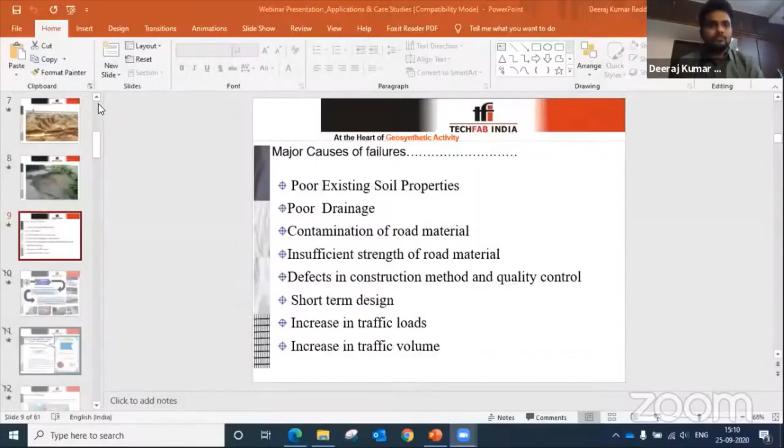So good afternoon all, myself Deeraj Kumar Reddy. So I feel privileged to be one of the resource persons speaking in front of you all, and being one of the alumni of Vidyanikethan Engineering College. And today the presentation I'll be speaking on is applications and case studies of geosynthetic materials in road pavements.

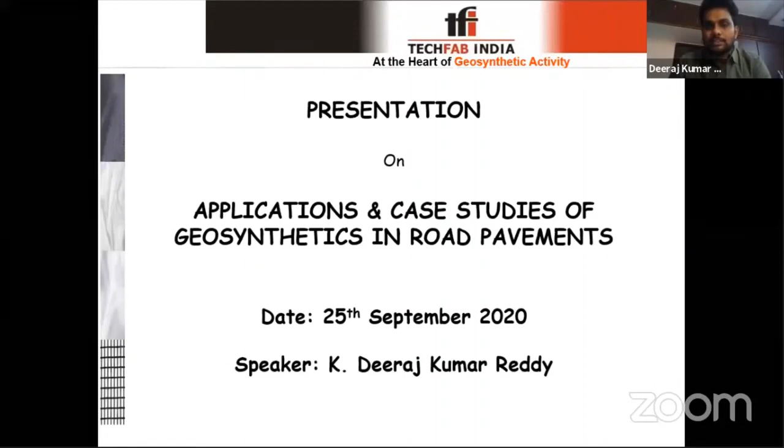So now, as you are aware, the development of roads is given prior importance in India. And just for your knowledge, in India, 60% of total goods and 85% of total passenger traffic is carried by road networks. And as a result of that, over a period of the last 60 years, the road network has increased by 11 times.

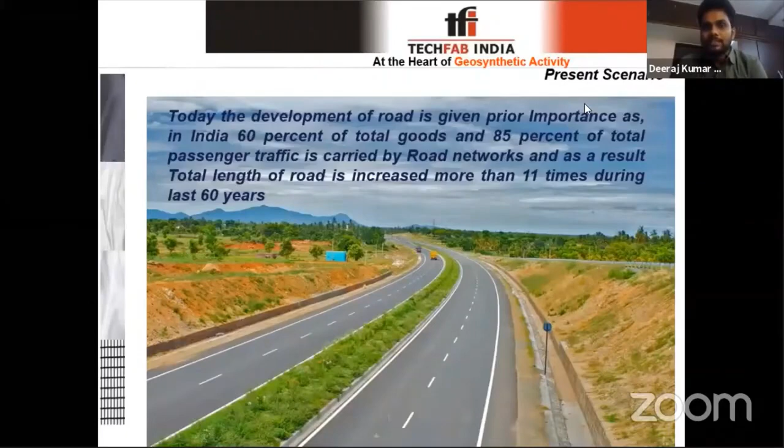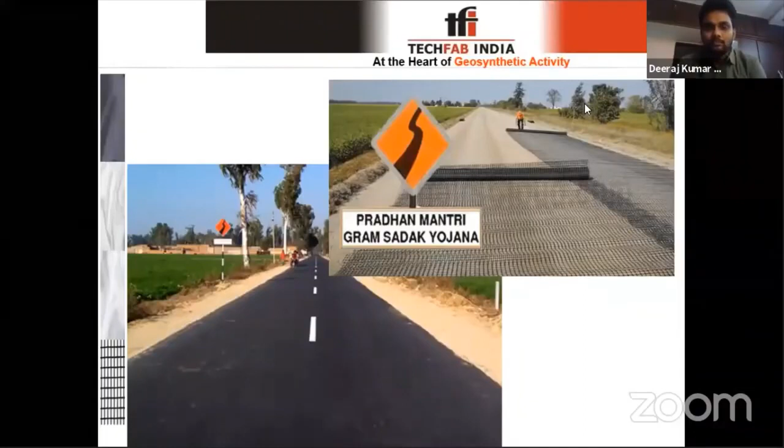And I'm very happy to present you very good roads in India, including the rural roads, which have been of prime importance over the past few years. But at the same time, we should accept some harsh reality where due to various reasons, the situation of roads in India are like this.

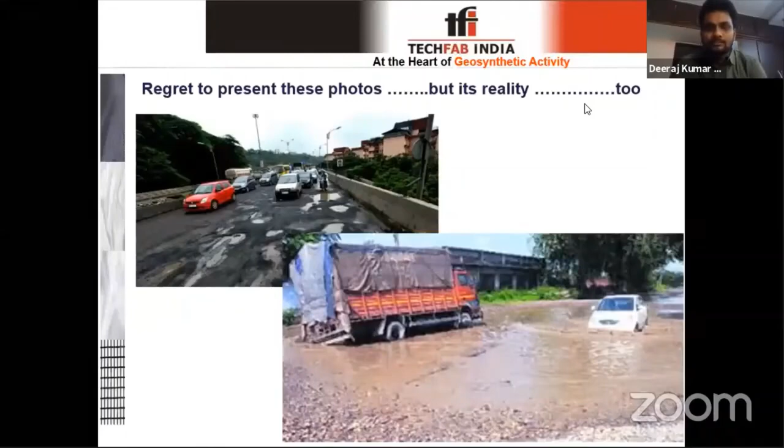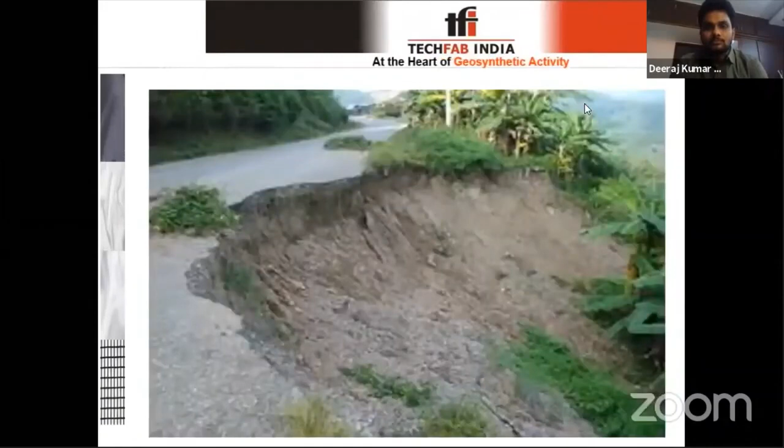Due to poor drainage systems, slope failures, or erosion failures. So when we talk about the major causes of these failures, starting from the poor existing soil properties, because we cannot eliminate the use of poor grounds from constructing the road network, and the poor drainage - that is, when we are planning for construction of a road pavement, we do not plan the drainage system, which is of prime importance.

And the poor drainage system will cause the failure of the total structure, and the contamination of road material. Then it is the insufficient strength of road material, that is the granular materials that we use in the road pavements - if we have insufficient strength, that can lead to the failure of road pavements. Defects in construction method and quality control.

Even if you design with 100% accuracy and perfection, if someone at the site doesn't implement what you have designed correctly, that leads to failure of your design structure. Then there's short-term design, increase in traffic loads or volume. At the design stage, you design the road pavement for 15 to 20 years, and if the traffic intended for 15 to 20 years is fulfilled within 5 years, that is a short-term design. That is also one more reason where road pavements fail.

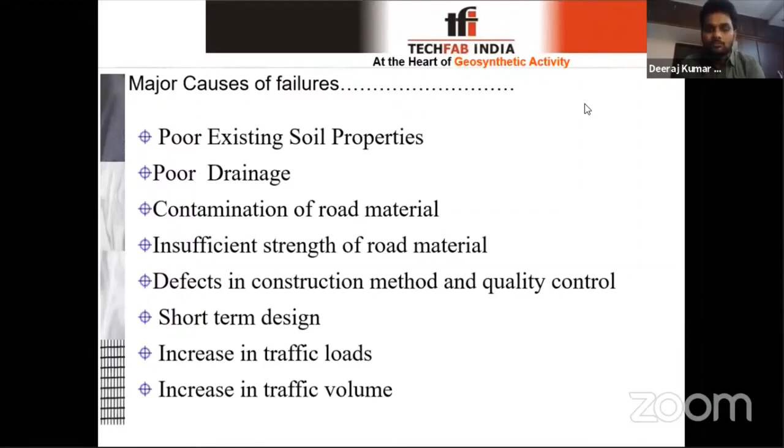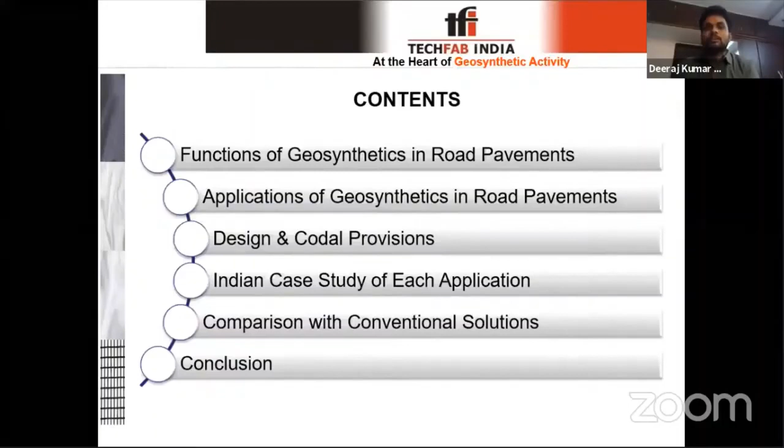Now that we have discussed various causes of road failures, in today's presentation we will see the functions of various geosynthetic materials which can be used in road pavements to address these issues, and the applications of geosynthetics in road pavements. With each application, I'll discuss the design and codal provisions, because there are certain codes and guidelines in India available for each application of geosynthetics. Earlier, before 5 or 6 years, the availability of standards and guidelines in India was very less for geosynthetic applications. But now they have emerged very rapidly, and usage has grown very much. For each application, I'll show you one case study of how it is implemented at site, and then we will see the comparison with conventional solutions, since geosynthetics are implemented as an alternative to conventional solutions.

Starting with the functions of geosynthetics, this is how we can avoid the failures we just discussed. First is separation function. Then it is drainage, the collecting of precipitated water and discharging it to safer places. Then it is filtration - allowing water to pass through different layers while not allowing soil to pass through, preventing the mixing of two soils while allowing water to dissipate. Then it is reinforcement, generally strengthening of a particular layer or material. And the barrier function, to arrest the capillary rise of water.

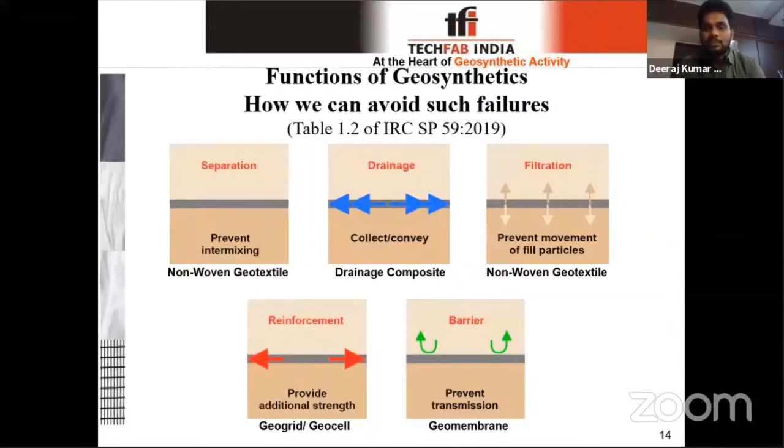With these functions, we have different applications of geosynthetics that we will see one by one. The applications of geosynthetics, which are cost-effective solutions with all codal provisions used as an alternative to conventional solutions, start from subgrade separation and stabilization.

If you are aware of the pavement structure, it has a subgrade, which we call the existing ground. On top of the subgrade we have GSB, granular subbase, made up of granular material. Then we have the base layer, wet mix macadam, and then the bituminous layers - this is in case of flexible pavement. In case of rigid pavement, there is an existing ground, and on top of that a granular subbase which acts as a filter layer or drainage layer, and then on top of that there will be a concrete slab. In all these layers or parts of the pavement, we have different applications of geosynthetics.

Starting from the bottom: subgrade stabilization or separation, then ground improvement for road embankments, because when your road embankment passes through very poor soil, you need to improve that ground to make it suitable for road construction. Then it is subsurface drainage, drainage within the pavement structures, because when rainfall happens and water infiltrates the pavement structure, that needs to be discharged to safer places. Otherwise, infiltrated water will stay within the pavement structure and destroy it.

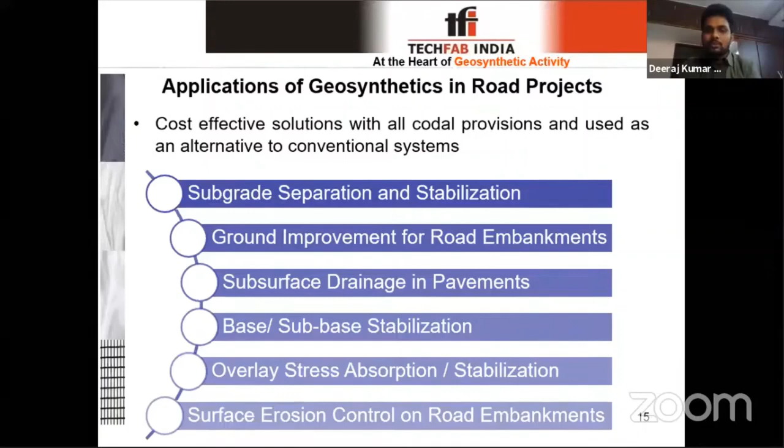Before going to the applications, I would like to focus on the standards and guidelines available for geosynthetic applications. First, the Ministry of Road Transport and Highway specification, section 700, which exclusively deals with the specification of geosynthetics for various applications in road construction. Then there is IRC 37, the guidelines for design of flexible pavements in India. And IRC SP 59, the guidelines for use of geosynthetics in road pavements and associated works - this code is exclusively for geosynthetics, covering design methodologies, applications, working mechanisms, installation methodologies, everything.

Then IRC SP 42 is the guidelines for road drainage, and IRC 113 is the guidelines for design and construction of geosynthetic reinforced embankments on soft subsoils. IRC 75 is the guidelines for high embankments. IRC 34 is the recommendations for road construction in areas affected by waterlogging, flooding, and salt infestation. Then IRC SP 116 is the guidelines for design and construction of gabion structures.

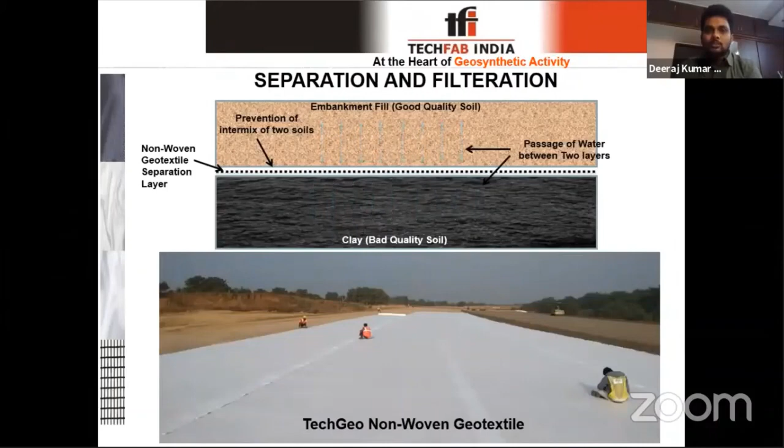So in order to separate these two layers, we use a non-woven geotextile which separates the two layers, and at the same time allows water to pass through, because if you arrest the water passage, it will develop pore water pressure and cause unnecessary problems. So this geotextile will only restrict the passage of soil particles and allow water to pass through. This is about separation and filtration.

When we talk about non-woven geotextile applications, the BIS code 16363, the Ministry of Road Transport specification, and IRC SP 59 cover the minimum requirements of geotextiles for use in road pavements as a separation or filtration layer. There are three conditions of installation, and based on our project situation, we can adopt the type of geotextile to be used, because harsh, moderate, or less severe site conditions require different strength requirements of geotextiles.

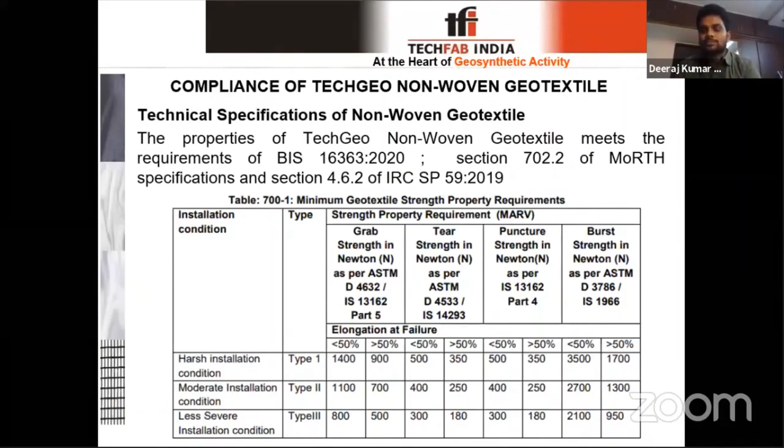Regarding the case study for the separation and filtration function, I'll show you one of the projects which is executed, or being executed, in Gujarat currently. That is the Vadodara Kim Expressway, executed by NHAI, with the contractor being L&T.

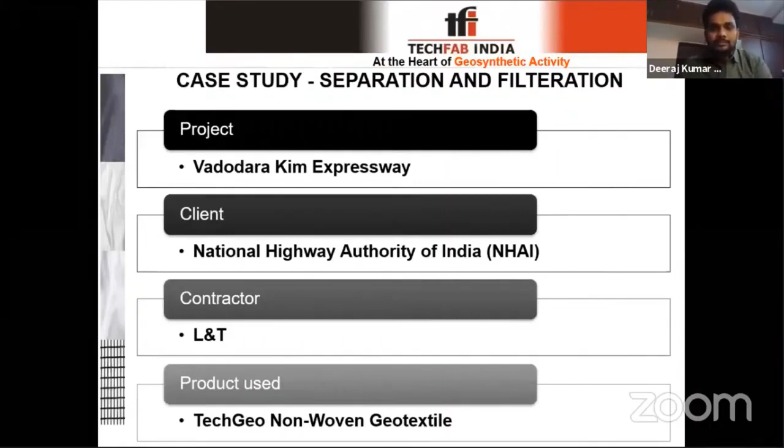Actually, the soft clay in the existing soil was the main problem here, along with the possibility of intermixing with the granular layers above, which would deteriorate the strength of the granular layers. Hence, there was a need for a separation and filtration layer, and the non-woven geotextile, meeting the requirements of MORTH 700 specification for separation and filtration geotextile, was used in this project. You can see the condition of the soil in the subgrade, which is purely black cotton soil, expansive and very weak in strength.

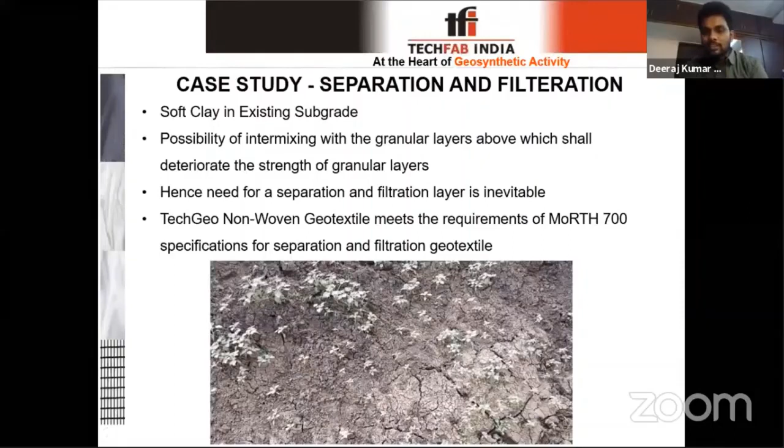These are some of the project photographs. Basically these geotextiles come in the form of rolls, where each roll is around 5 meters wide and 100 meters long, and these can be customized based on our requirement.

These rolls are first unrolled as per our markings, and as the road pavement is wider than the geotextile, adjacent rolls are needed, provided with an overlap of 100 to 150 mm. Once these geotextiles are laid, the remaining granular layers, gravel, GSB, and other layers will be laid, and this geotextile will prevent the bottom soil from mixing with the granular material laid on top of it.

The next application is ground improvement involving geosynthetics. This is especially required where you are constructing a road embankment, that is, making your road elevated from the existing ground. There are various options like basal reinforcement, reinforcing the bottom of the embankment with geogrid or geocell, and subsurface drainage, where infiltrated water from the top or capillary rise needs to be discharged laterally using subsurface drainage and separation geotextile, as we have seen. There are other applications too, like deep foundations with basal reinforcement with piles, and staged construction with PVDs and stone columns.

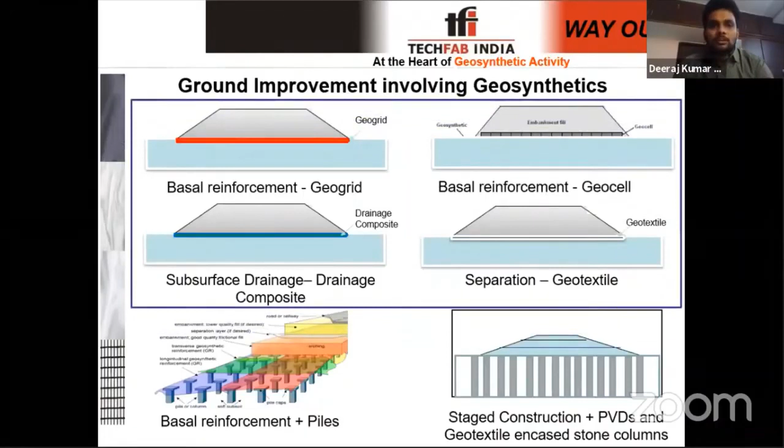Now our focus will be on the stabilizing of road embankments with geocell. So what happens is, when you have a road embankment and your loads come from the top, this is the comparison between the road embankment without reinforcement and with reinforcement.

At the point where your reinforcement is laid, you can see the difference, because whatever loads come from the top of the embankment are directly transferred onto the poor soil conditions in an unreinforced embankment. In case of a reinforced embankment, this is a geocell, a 3-dimensional honeycomb structure. If you fill some material in the geocell, through lateral confinement it confines the material and forms a slab-like structure.

At this point, whatever loads or pressures come from the top will be dispersed laterally. This is the reinforcement effect, where pressures and loads are dispersed laterally. It's not completely dispersed - some amount will be dispersed laterally and the remaining transferred down. So the loads coming from the top are minimized on the poor ground, enhancing the performance of the road structure.

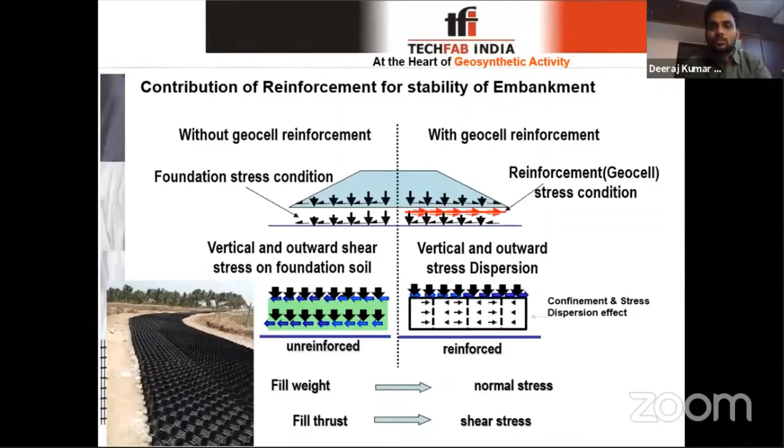Regarding the design of geosynthetic reinforced embankments, I've discussed the various codes - IRC 75, which gives guidelines for design of high embankments, and IRC 113, which covers design and construction of geosynthetic reinforced embankments. If you have basic fundamentals of geotechnical engineering, you can easily understand the guidelines or standards given in this course.

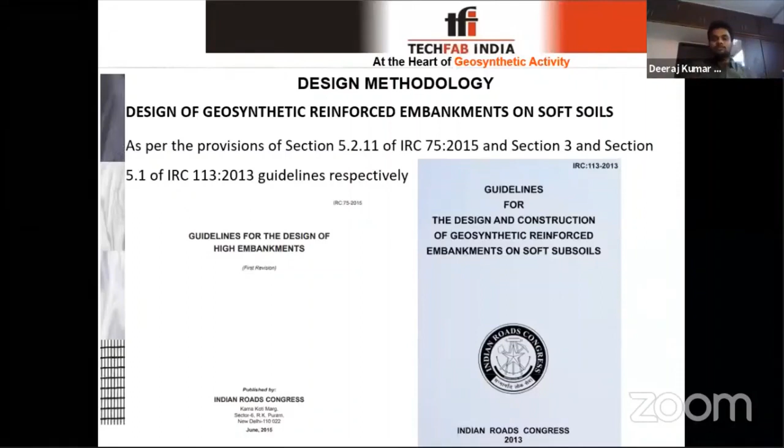Regarding the technical specification of the geocell, that is specified in the ministry's specification and IRC SP 59, which includes density, environmental stress crack resistance, carbon black content, cell wall thickness, peel strength, and creep rupture strength of the geocell.

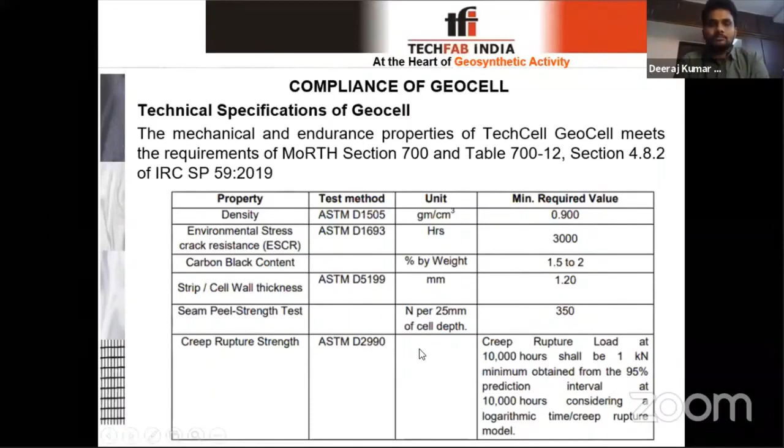Regarding a project which includes geocell, I'll discuss one project at JNPT, that is Jawaharlal Nehru Port Trust in Mumbai.

The site was near shorelines, complete marine clay, which was having differential settlements, and the parking lot would be subjected to very heavy loads with containers and trucks. So very poor bearing capacity of foundation soil and differential settlements were the major problems. These problems required measures which would dissipate the loads evenly and minimize these issues. As you can see in one of the photographs, the ground is sinking here.

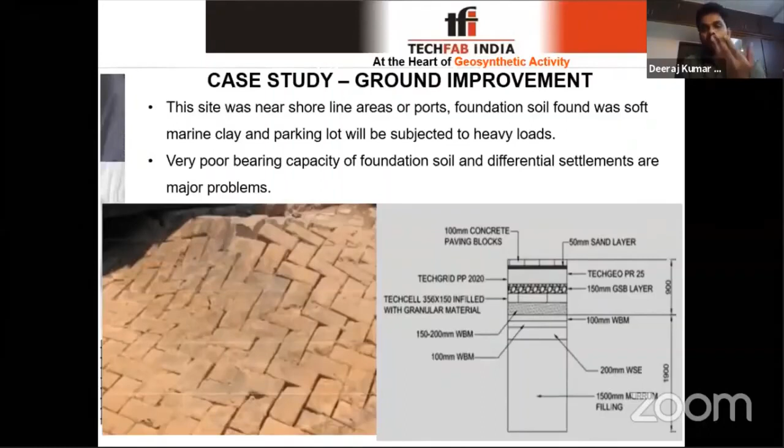This is the problem - loads such as containers or heavy trucks, if they come on top of this kind of ground, they absolutely sink at that point. These are some of the photographs.

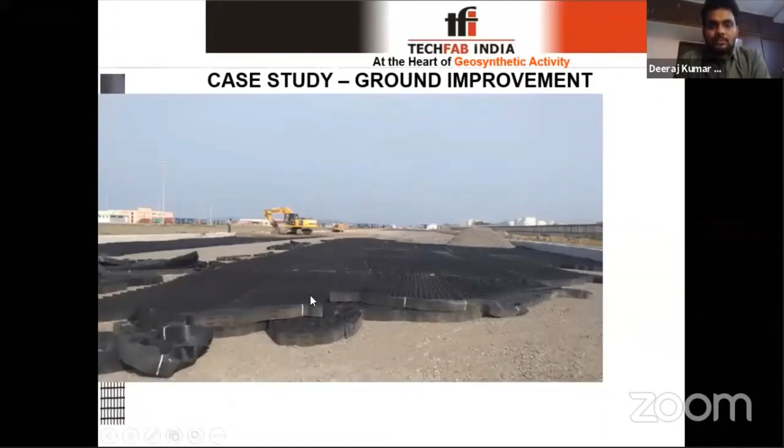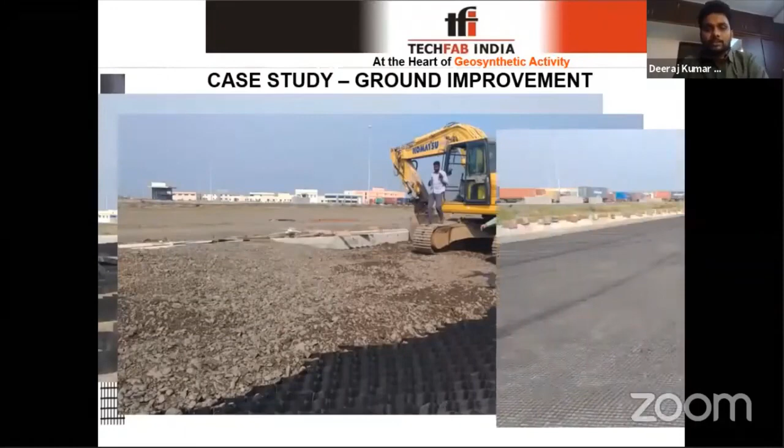These are the geocell panels which are spread initially on the ground, and in these geocell panels the fill material, that is granular fill, is spread and compacted. This is a geogrid for more even distribution of loads. And this is the finished structure of the parking lot.

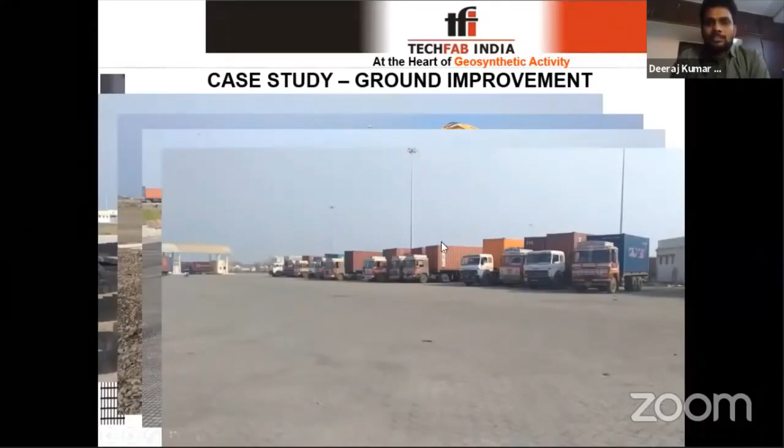So this is about the case study of ground improvement. Next, we will talk about the most happening or most trending application of geosynthetics in India in the last year - stabilizing the base and subbase layers of the pavement.

These base and subbase layers, which are the granular layers of the pavement, if we strengthen these granular layers, that will improve the modulus of that layer and thereby enhance the life of the pavement. Or if we want to keep the life of the pavement the same, we can optimize the cost of construction of the project.

If the cost of construction of a particular project is maybe 100 crores, we can optimize it - even if we optimize it by at least 10 crores, that is also a huge saving for the contractor or for the government.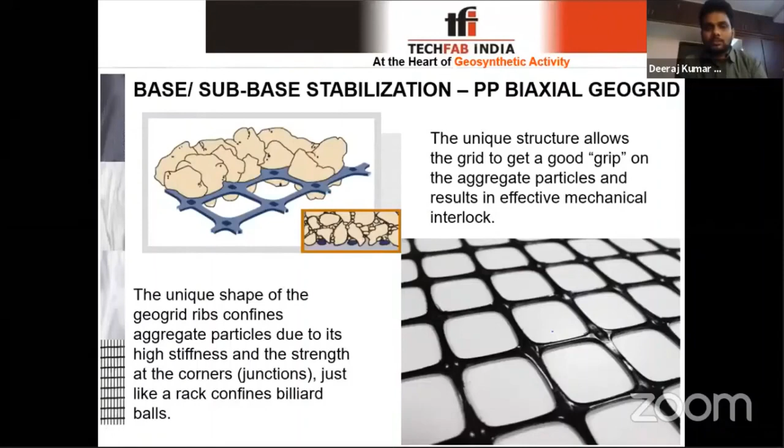The geogrid shown in this photograph is a biaxial geogrid, which has extrusions at the junctions, and this unique structure allows a good grip on the aggregate particles. If you have the aggregates on these apertures, they interlock with each other and you get a grip, thereby the strength effect is transferred onto the aggregates, and your layer gets strengthened.

So what are the benefits of PP biaxial geogrids in the pavement? First is thickness reduction. For example, if you have a constant life and soil properties used for conventional pavement, you can reduce the thickness of each layer. When you reduce the thickness of each layer, that directly impacts the cost of the total project.

Then there's an increase in the design life. For example, if conventional pavement is designed for 15 years, and at later stages during construction the authority decides to improve the design life from 15 to 20 or 25 years, that can be achieved using reinforcement in the base and sub-base layers, because that will enhance the life of the pavement.

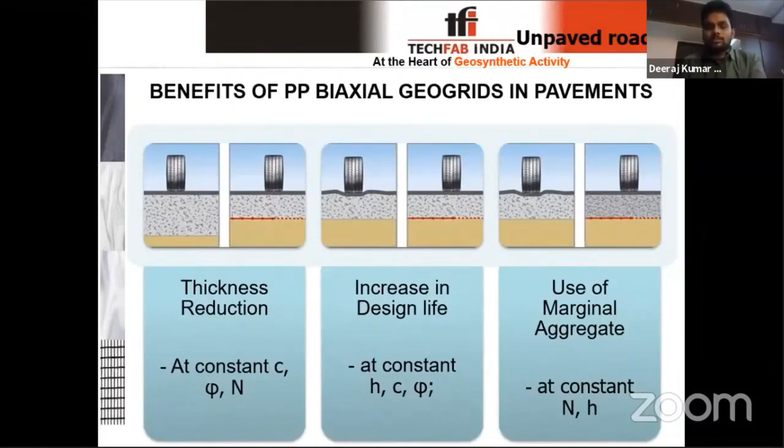Then use of marginal aggregate. Marginal aggregate is material that does not have the required strength of the natural aggregate used in pavements. These are especially available in the east and northeastern parts of India, where you do not get adequate strength of aggregate materials. So that material can also be made use of in the pavement structure using reinforcement, thereby strengthening that particular layer.

When we talk about the design methodology, IRC 37 2018 and IRC SP 59 cover the design methodology of reinforced pavement using two methods: the modulus improvement factor method and the layer coefficient ratio method. Either of these we can use to improve the modulus of that particular layer, and when we improve the modulus, the strength of the pavement is being improved.

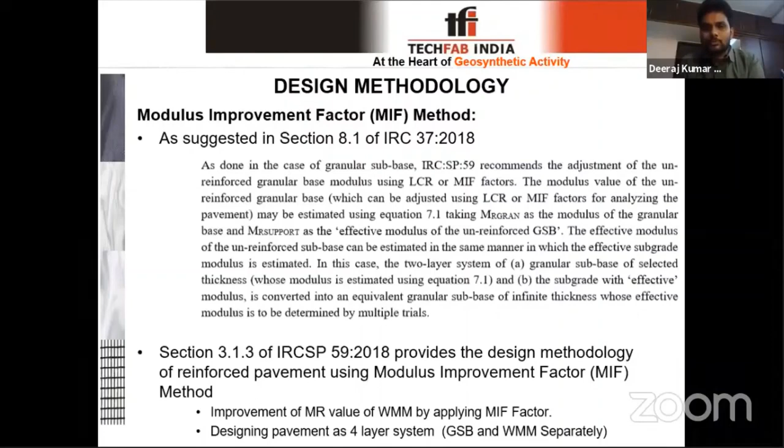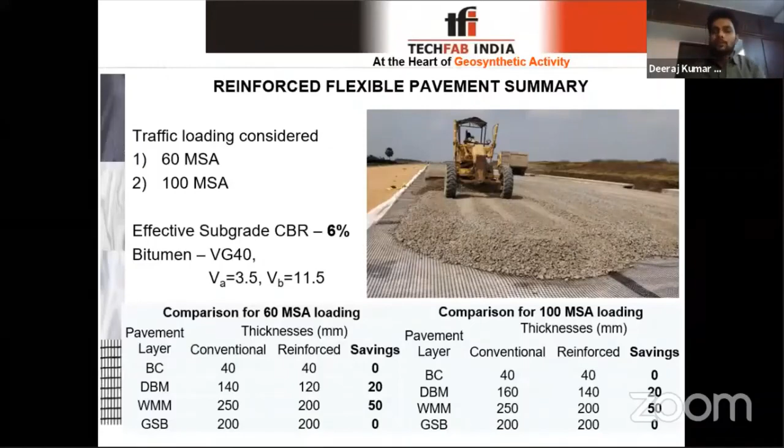This is a calculation, I'm not going into the depth of it. This is a summary where you have traffic loading of 60 million standard axles and 100 million standard axles, and your subgrade, the existing soil CBR, is 6%. Just showing a comparison where you can see the bituminous layers and granular layers, you can save certain thickness, that is 20 mm and 50 mm. That means there is a significant saving in the material being used, and at the same time your construction period also comes down, resulting in overall reduction in the cost of the project.

When we talk about specification, the BIS code 17371 and the ministry specification IRC SP 59 specify the same table I'm showing here, where the stiffness of the geogrid, the strength at 2% and 5% strains - the requirement is to achieve maximum strength at very minimal strains. Then the junction efficiency, as I was saying, is the most unique part, the junction of this geogrid, so junction efficiency is one of the main factors. And the ultraviolet stability is for the durability of the geogrid.

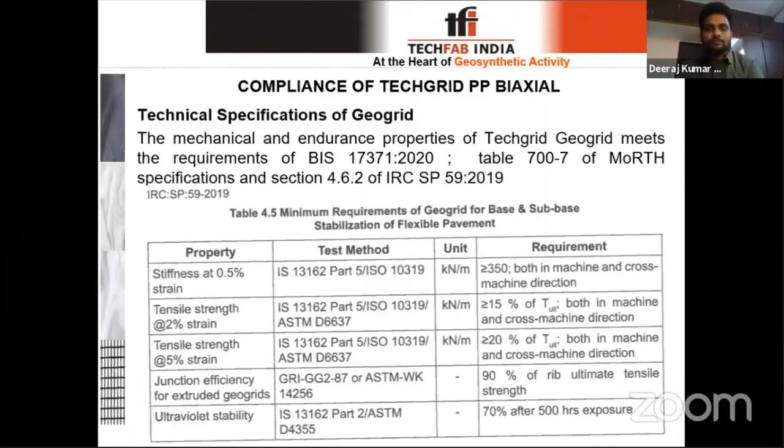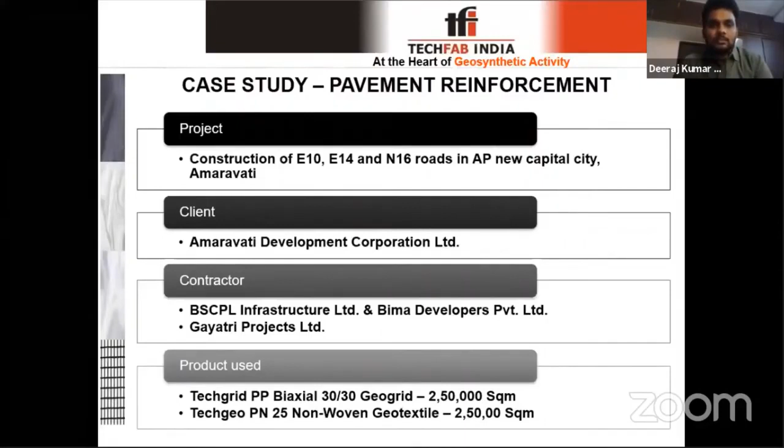So for a project regarding geogrid application, I'm going to show you one road project that has already been implemented in Amaravati, in Andhra Pradesh. This was executed by BSCPL and Gayatri Projects.

The project site was mostly clay, and the swelling pressure was the most important thing, ranging up to 200%. So you can imagine what kind of pressure that can exert on the structure. In semi-arid climatic conditions, with short wet and dry conditions, the swelling pressure and shrinkage problems will happen.

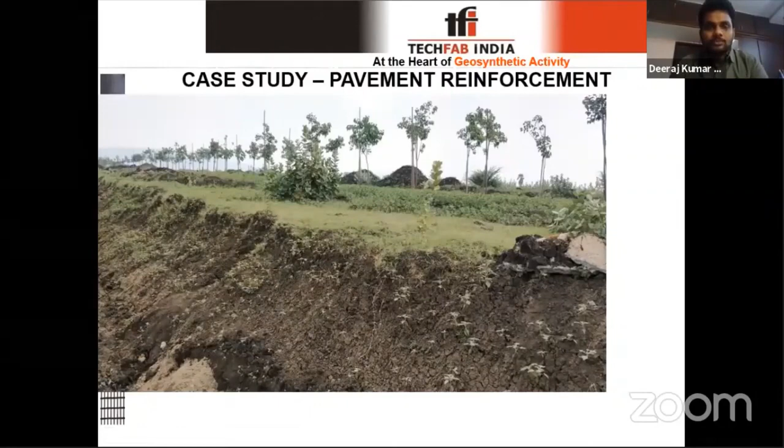These are some of the project photographs. You can see this is completely an agricultural field where the road is passing through. This is complete black cotton soil, and the soil was excavated and the surface was formed as per the level requirements.

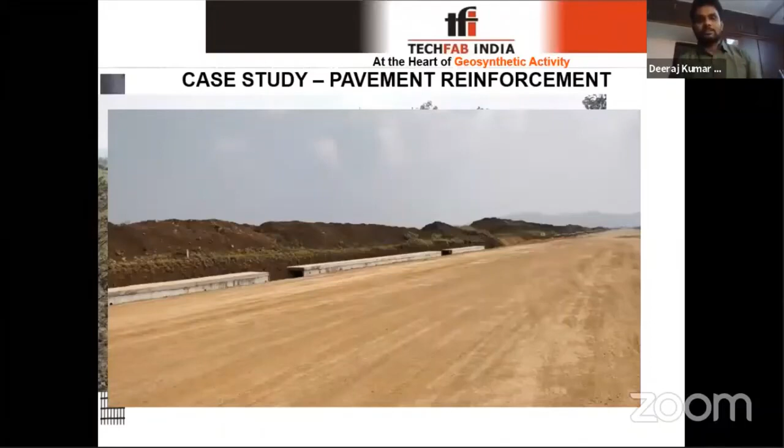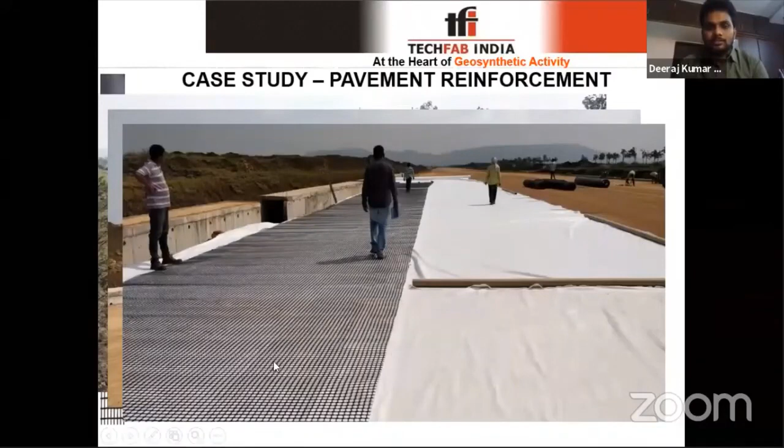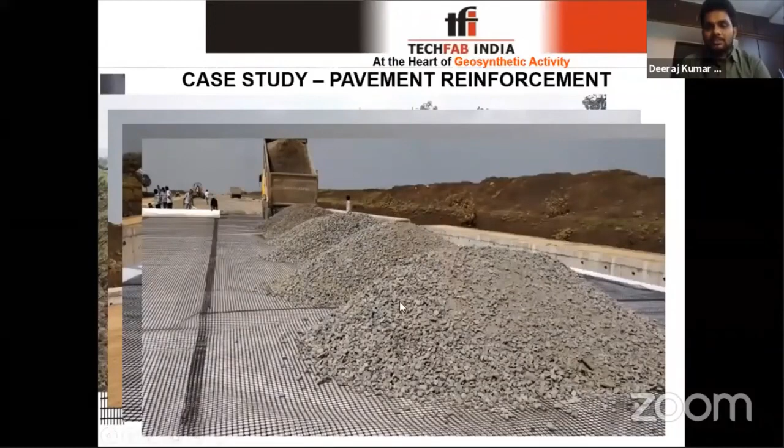On this formed surface, this white colored one is a non-woven geotextile, and this is a geogrid. First the geotextile is laid, and then the geogrid. You can see the adjacent rolls are overlapped, and using dumpers, the GSB material, that is granular subbase material aggregate, was dumped, then spread and compacted.

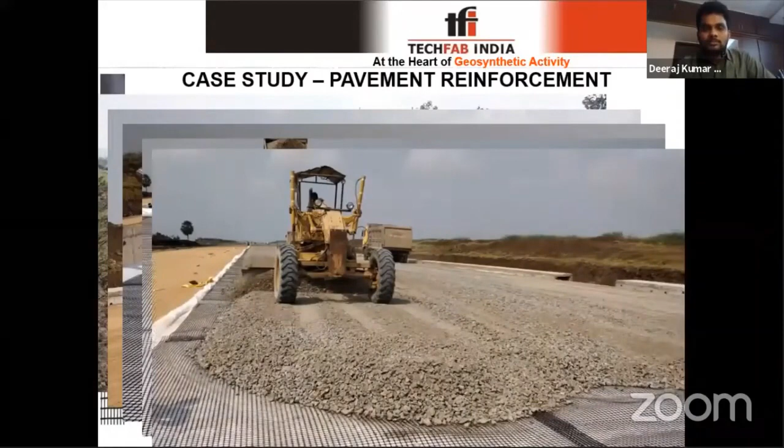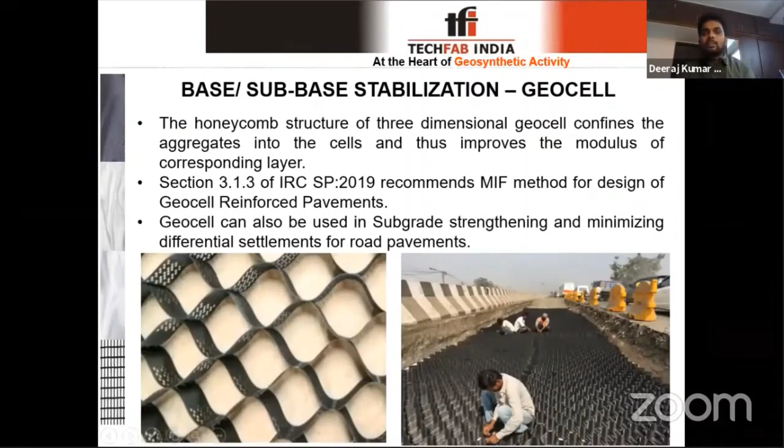So this is about base and subbase stabilization. One more point, I was discussing geogrid for base and subbase stabilization. As per Indian Road Congress guidelines, geocell can also be used for base and subbase stabilization. This is the geocell material, the honeycomb structure, which is three-dimensional in nature. This geocell can also be used in subgrade strengthening and minimizing differential settlements for road pavement.

Next is subsurface drainage. You have a road pavement on the top of the ground, and when rainfall happens, water infiltrates into the pavement structure. That water needs to be dissipated away from the pavement. This is a collect and convey mechanism, where you have a drainage composite with two sides of geotextiles and a core in between. When water passes through the pavement structure, it is collected into the drainage core, which transmits and discharges the water outside. This is subsurface drainage.

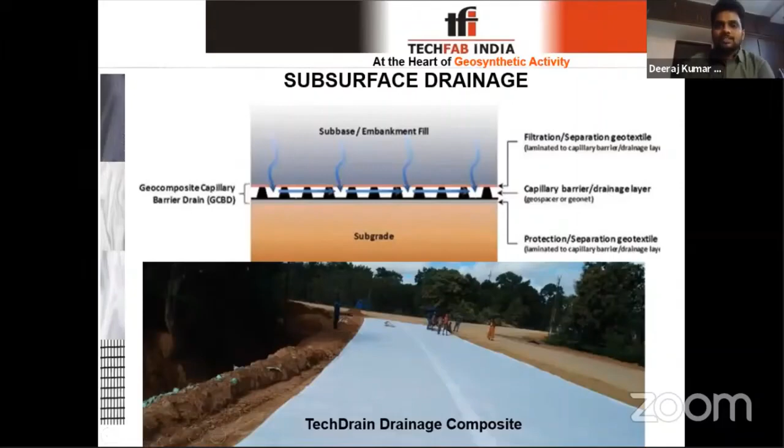Regarding the codal provisions for drainage composite, first is IRC 37, the guidelines for design of flexible pavements. It gives the provision of using drainage composite in case of CTSB road pavements. CTSB is cement treated subbase, where you strengthen the base and subbase layers using cementitious materials. When that strengthening happens, the granular layers lose their drainage characteristics. So to compensate that loss, IRC 37 specifies the use of drainage composite as a compensating material.

Next is IRC SP 42, the guidelines for road drainage. This is applicable for both rigid and flexible pavement, especially in case of rigid pavement, where the granular subbase or aggregate material only serves the purpose of drainage and not structural importance. There, the granular material can be replaced with drainage composite.

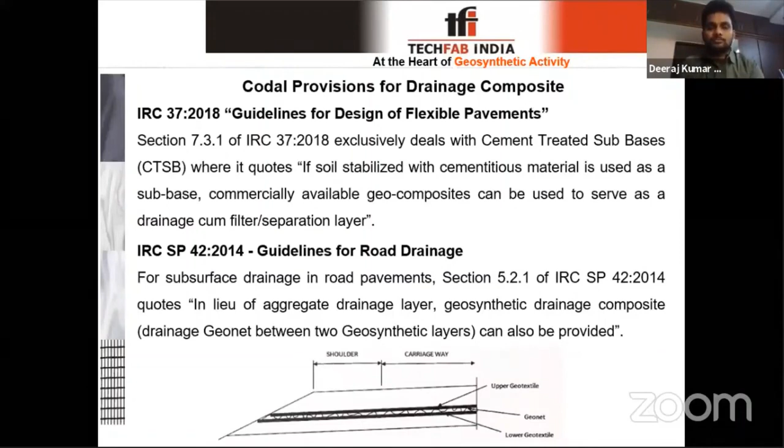Now for road drainage, there is one more application in IRC SP 42, the arresting of capillary rise. If you have a drainage composite at a particular level above which you do not want water to enter the road embankment, you can place a drainage composite which will collect the water coming from the bottom and discharge it away from the embankment.

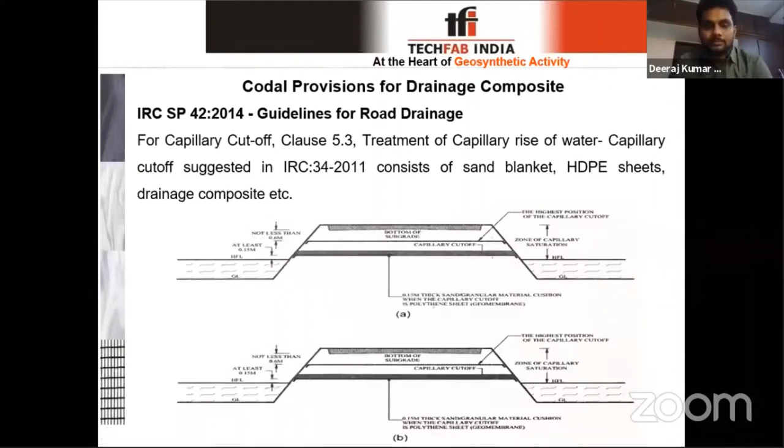These are the recommendations for road construction in areas affected by waterlogging or flooding, where if you have a cutting for the construction of roads, at the edge there will be side drains or French drains constructed. IRC 34 recommends the use of drainage composite for the edge drains or fin drains also.

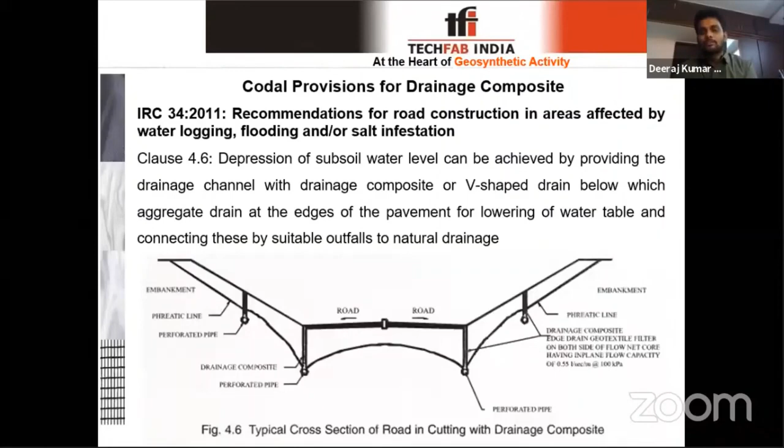When we talk about the technical properties or specification of drainage composite, we have strength, puncture resistance, and hydraulic properties. That is, at a pressure of 100 kPa or 200 kPa, the in-plane permeability of the drainage composite should satisfy these limits, as per MORTH or IRC 34.

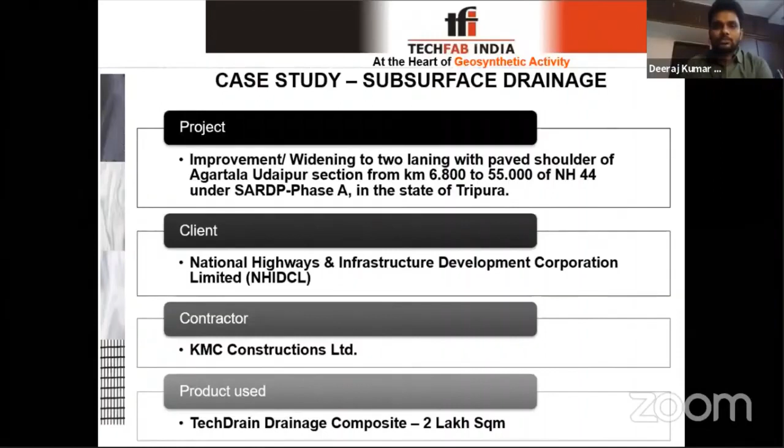This is one of the projects, the improvement and widening to two laning with paved shoulders in Agartala, state of Tripura. This was executed by NHIDCL, the National Highway and Infrastructure Development Corporation, with KMC Constructions as the contractor. Agartala, Tripura, is a very heavy rainfall area, so subsurface drainage was of utmost importance. The availability of aggregate for construction of conventional GSB material was very scarce, and they used to procure it from 100 or 150 kilometers away, or more.

Under such conditions, soil cement stabilized subbase was adopted by the contractor. Then CRRI, the Central Road Research Institute, recommended the use of drainage composite since they were using soil cement stabilized subbase, to compensate for the drainage. So CRRI recommended the use of drainage composite at the subbase.

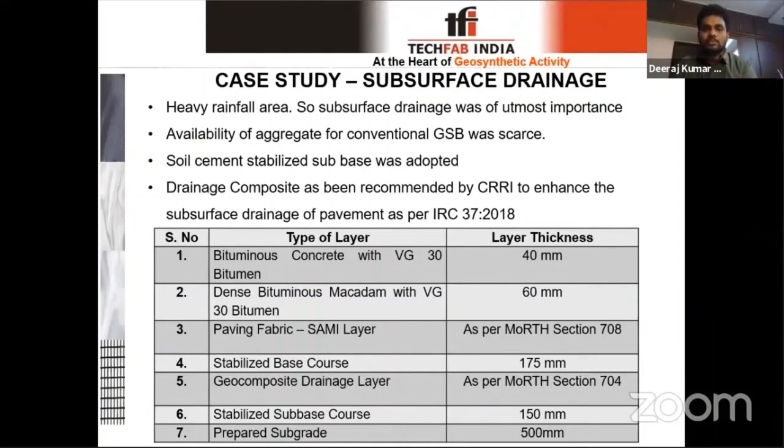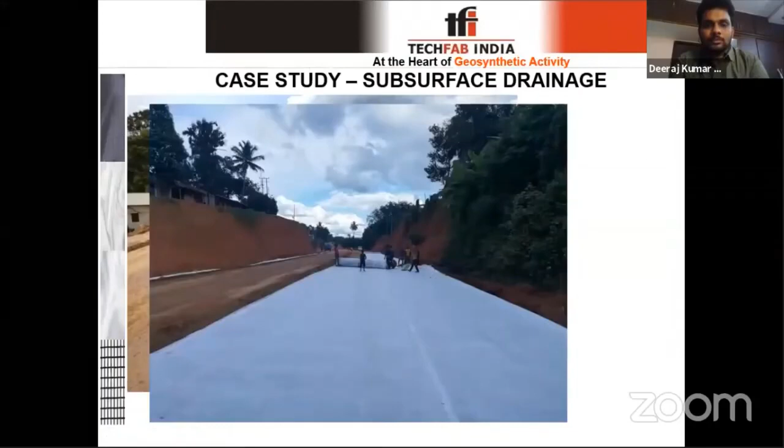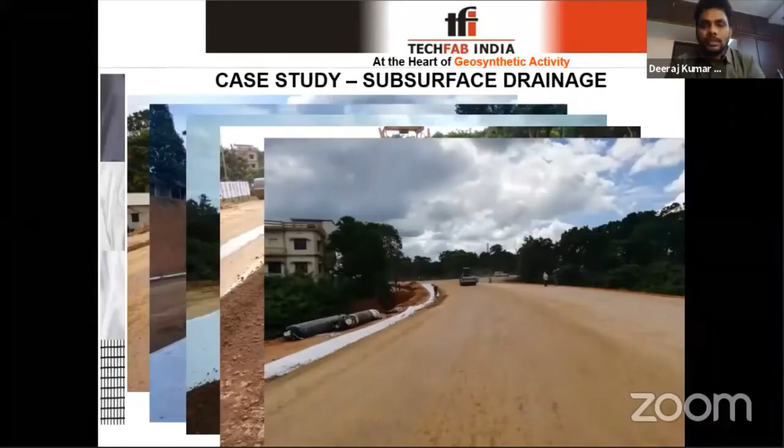These are some of the photographs. This is the preparation of the surface. Once the surface is prepared, rolls of drainage composite are unrolled, and the adjacent rolls, as said earlier, are maintained with overlap. Once these rolls are unrolled, fill material is dumped, spread, and then compacted. This is the application of subsurface drainage using geosynthetic material.

Now the overlay stabilization, that is stabilizing the bituminous or asphalt layers. Generally, at regular intervals, after every 5 or 10 years, they do an overlay on the existing road, as there might already be the presence of cracks which create the requirement of overlay.

Due to that, they again do blacktopping for about 40 to 50 mm, and it looks like a new road. But there will already be cracks present on the old pavement layer. So if we lay the new layer on top of the cracked surface, over a period of time, maybe after 3 or 4 years, these cracks propagate from the old layer to the new layer. We call this bottom-up cracking.

This will again damage the new overlay. So to prevent that, if we lay an interlayer before laying the new layer, it will arrest the old cracks at that particular position and prevent the propagation of cracks to the new layer. This will enhance the life of the overlay, whatever blacktopping we are doing, which enhances the life of the pavement. In effect, it will minimize the maintenance cost.

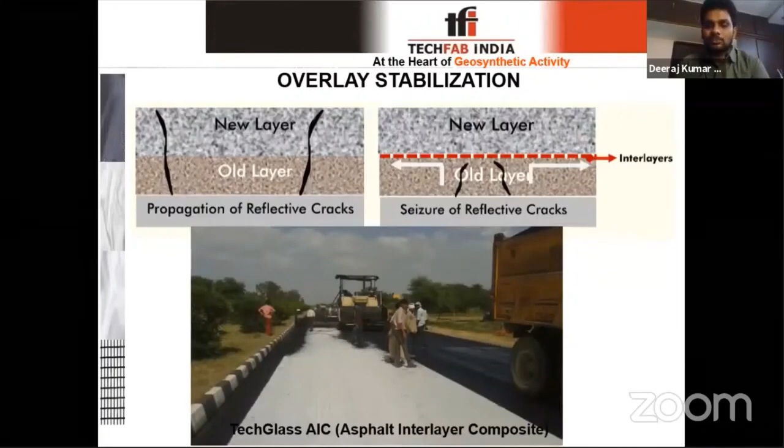For asphalt reinforcement, IRC SP 59, the guidelines for use of geosynthetics, gives the detailed specification and mechanism of how it works. The asphalt reinforcement reduces the reflective cracks, that is, the bottom-up cracking I mentioned earlier, which we call reflective cracking.

The asphalt reinforcement reduces reflective cracking and improves moisture barrier by impregnating with bitumen in the tack coat. Generally, the paving fabric, paving grids, and asphalt interlayer composites are all glass fiber materials, made up of glass fibers, in order to take care of the high temperatures present in the bituminous layers.

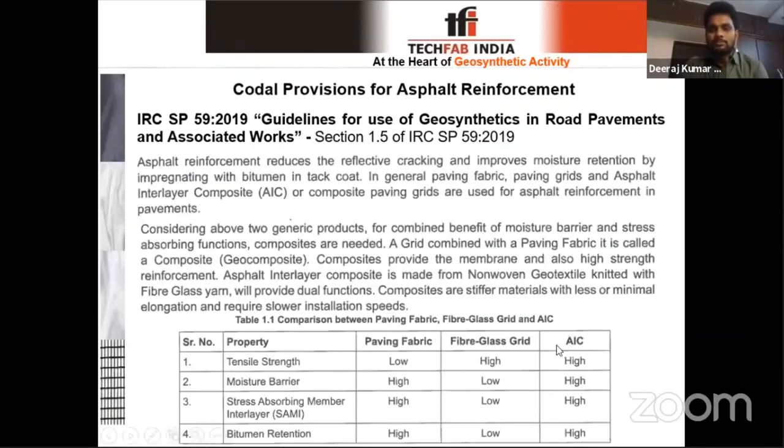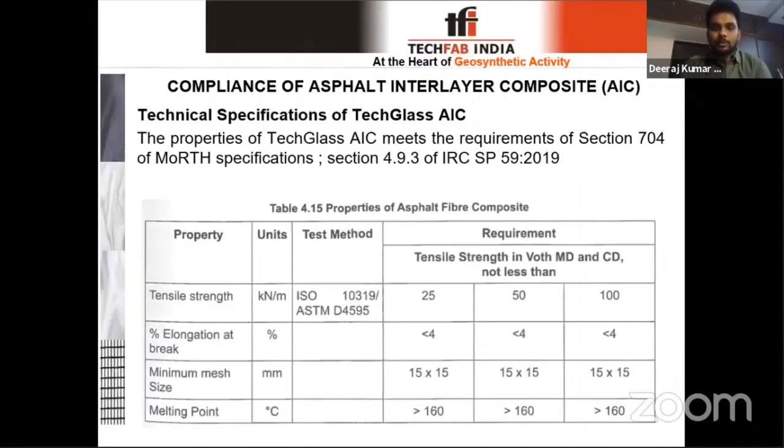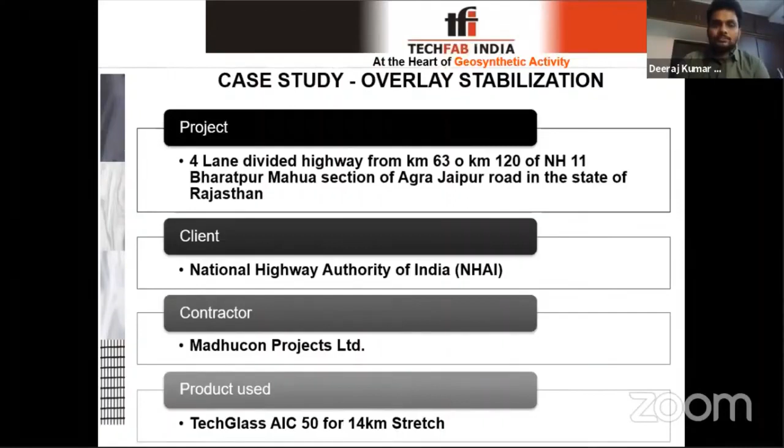Regarding overlay stabilization, this is a project in the state of Rajasthan, the road project between Bharatpur and Mahua, executed by NHAI, with Madhucon Projects as the contractor.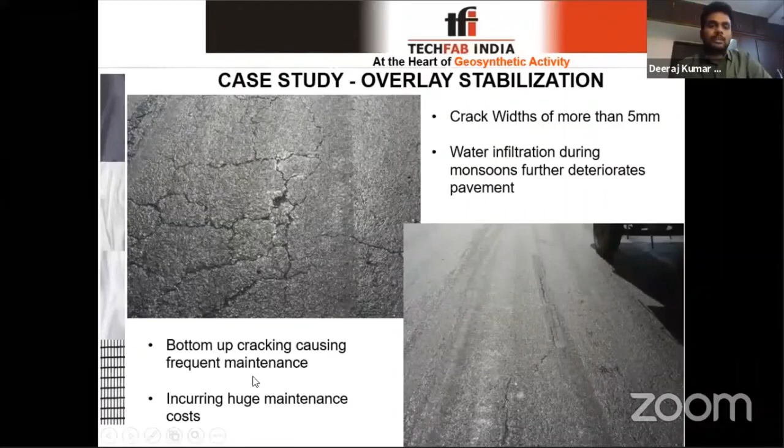If the contractor lays blacktopping on top of it again, the bottom up cracking will cause frequent maintenance, which will increase maintenance costs.

To overcome that, they introduced an interlayer using an asphalt interlayer composite, a glass fiber composite, on top of the existing road.

You can see the cracks here - this is the existing road, and this is the glass fiber composite which is laid on the existing road.

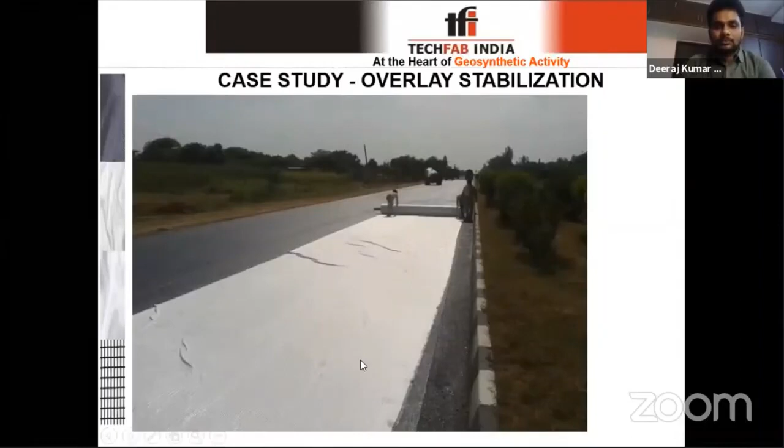Once this roll is unrolled, the tack coat is applied and the bituminous topping is laid.

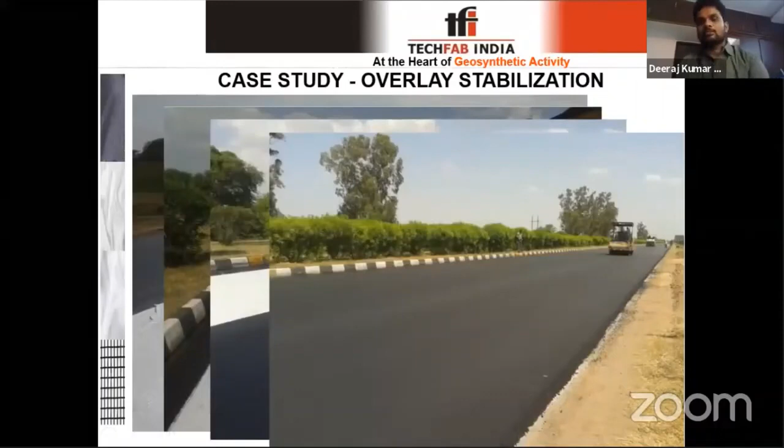This is the compaction, and this is the finished road with the interlayer material. This will increase the life of your blacktopping or overlay.

The next application is slope erosion control. Often you might have seen road embankments where the slopes are getting eroded over time due to rainfall or surface water flow. To prevent erosion of road embankments, conventionally there are materials like stone pitching.

They do 300 mm thick, that is 0.3 meter thick stone pitching, or concreting. As an alternative, there is a geocell of lower thickness, that is 75 mm or 100 mm thick.

In the geocell, you can either fill vegetative soil. If you fill vegetative soil and do regular watering, vegetation will come on the geocell or slope surface. And if there are conditions where growth of vegetation is very difficult due to climatic conditions,

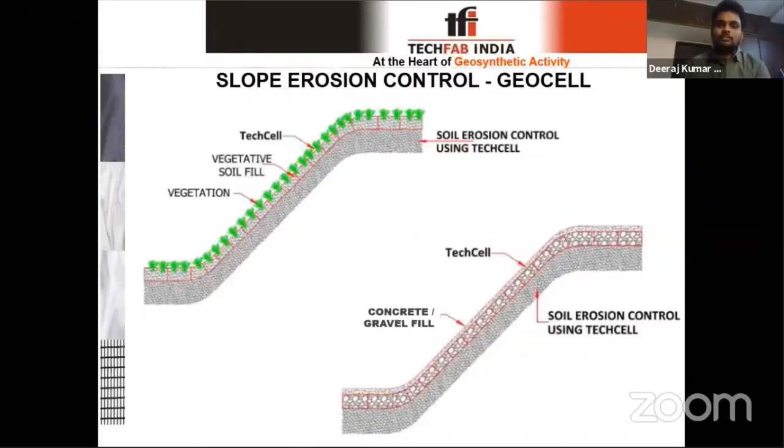or you do not want to get into regular watering, then concrete or gravel fill in the geocell will serve the purpose. The specification of the geocell remains the same as the earlier application, except the thickness of the geocell.

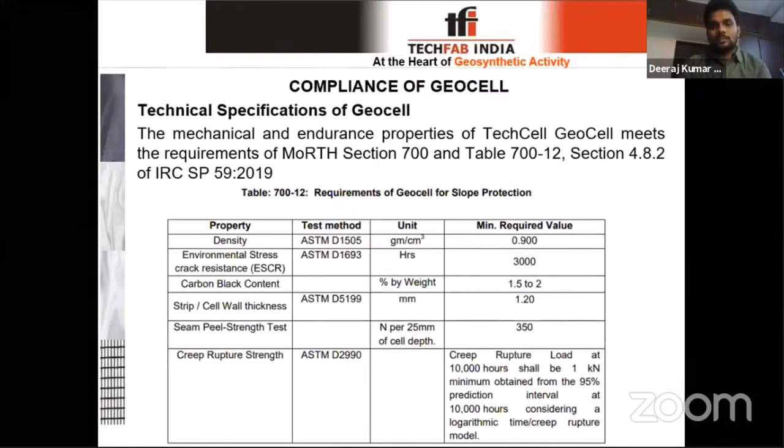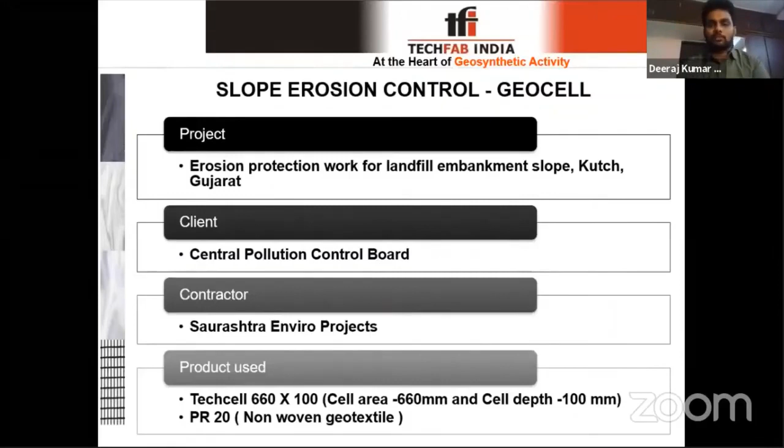Next is the case study for slope erosion control, the erosion protection work for a landfill embankment in the region of Kutch in Gujarat, executed by Central Pollution Control Board, with Saurashtra Enviro Projects as the contractor.

The landfill surface got damaged during the first monsoon itself, post construction, which left the embankment slope with many rain cuts, rills or gullies. Due to these heavy rains and after the damage, the continuous impact of rains made these cuts or gullies become very deep.

So the authority decided to go with an advanced and permanent environmental friendly solution to prevent the existing damaged slopes from erosion.

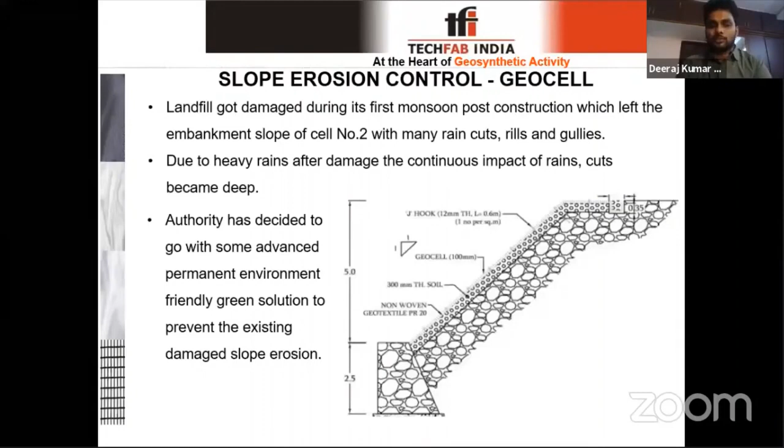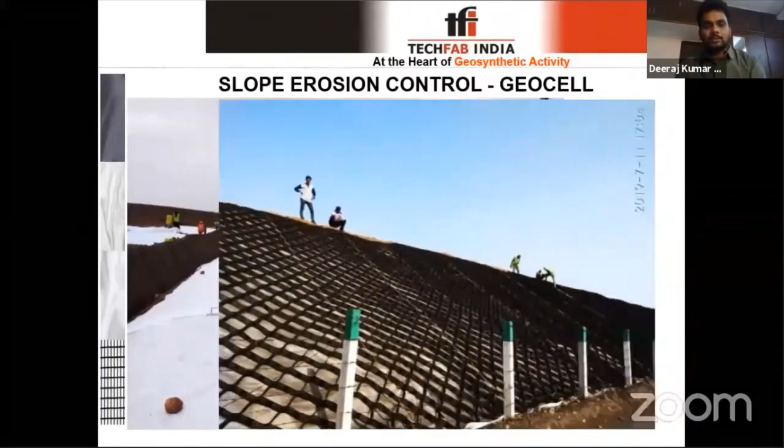This surface was first covered with a geotextile to prevent migration of fine particles, and then the geocell was laid.

In the geocell, soil was filled, and in this soil itself some seeds were mixed before filling. So what happens is, due to these seeds, when you do the watering, vegetation automatically comes.

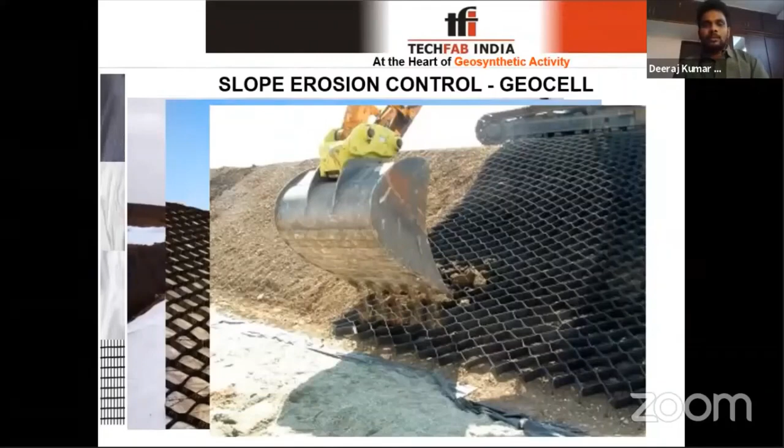Apart from this, I was talking about the other alternative also, that is concrete filling. Here you can see this is PCC, plain cement concrete, being filled in the geocell.

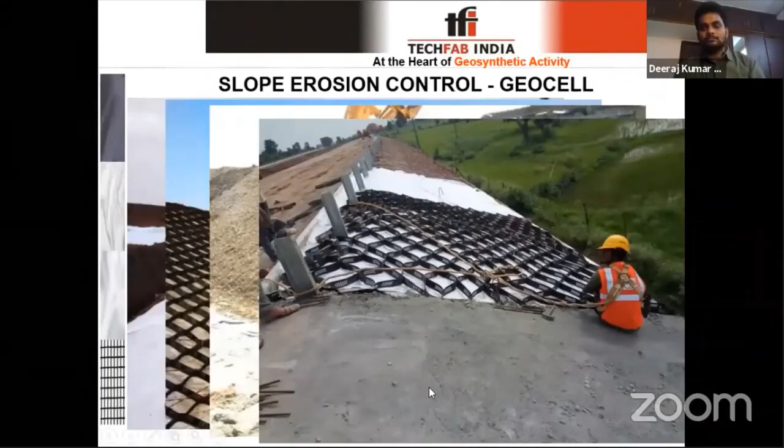So now to conclude, I would just like to revise the applications that we have seen, starting from separation and filtration, where we use a non-woven geotextile in place of a conventional well-graded sand layer. Then regarding the geocell or geogrid for ground improvement, where conventionally people use soil replacement, gravel filling, or chemical stabilization.

Then there is drainage composite, used for subsurface drainage in place of a well-graded aggregate layer, and geogrid reinforced flexible pavement in place of conventional flexible pavement. For overlays, where you have frequent overlays, to minimize that there is asphalt interlayer composite. And lastly, we have seen slope erosion control using a geocell, in place of concrete lining or stone pitching.

So if you observe in all the applications, we are using geosynthetic materials in soil stabilization or any strengthening layer in order to save natural resources, which are becoming very scarce now.

And by achieving that reduction in using natural resources, you are not only reducing the cost of the project, but also making the project happen very quickly. So this is the conclusion for today's presentation.